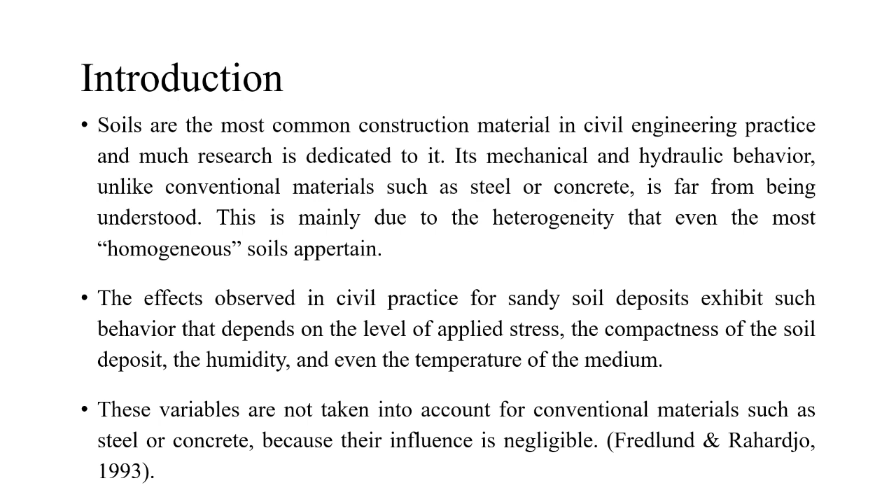In this regard, the prediction of the unsaturated soil fractions under a computational model that allows us to predict the volumes of the unsaturated fractions is of paramount importance. As an introduction, we are presenting the methodology to develop the computational approach to establish an algorithm for this.

As an introduction, we'll say that soils are the most common construction material in civil engineering practice. Its mechanical and hydraulic behavior, unlike conventional materials such as steel or concrete, are far from being well understood. For example, sand materials, which are among the most homogeneous materials, classified according to the Unified Soil Classification System as SP, poorly graded sands, are homogeneous materials which may have a particularly homogeneous size of solid grains.

However, even though these are uniform materials, in civil practice they still present lots of heterogeneity in terms of their mechanical and hydraulic behavior. For example, sometimes the flow of water in soils leads to variations in soil water content. These factors are the main issue that affect the flow of water, inducing permeability changes and mechanical variations such as volume strains.

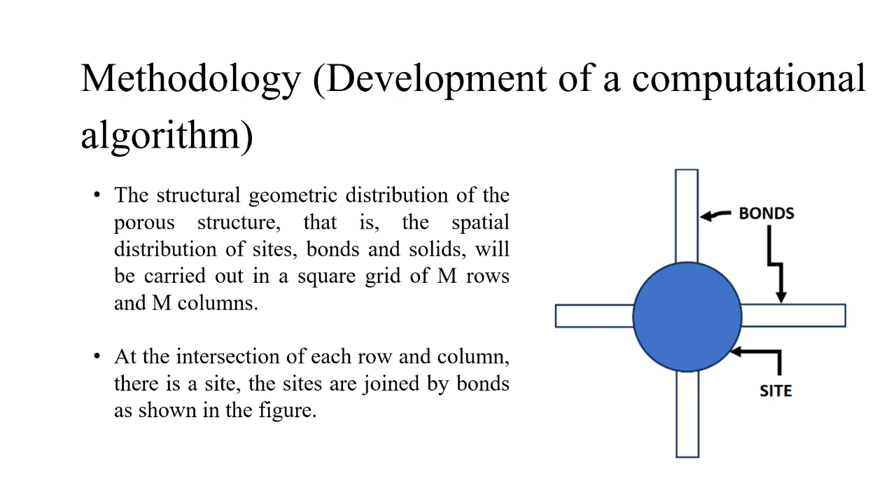It is important to determine that the number of sites and bonds that the numerical model will have will be determined by the frequency of each of them in the porous matrix. This frequency is commonly obtained from the pore size distribution, which is evaluated from the mercury intrusion porosimetry test. The frequency distribution can be expressed considering equation number 1, where f is the frequency and n is the number of sites contained within the porous matrix.

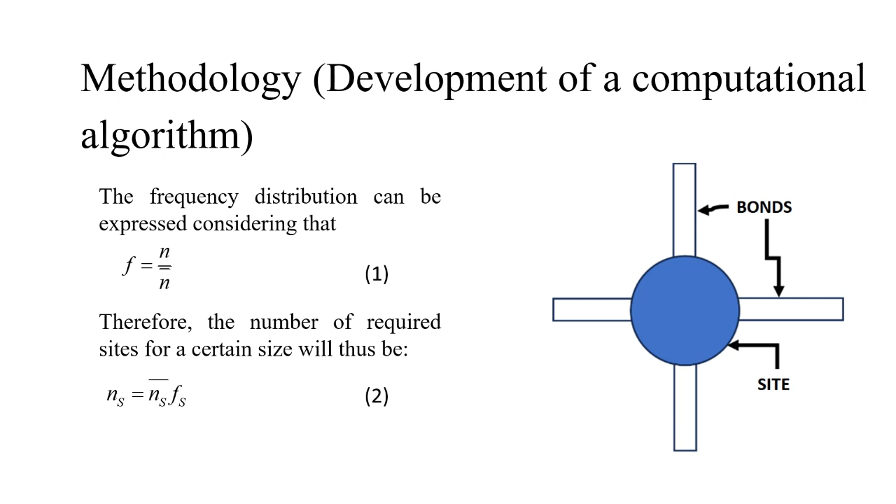Therefore, the number of required sites for a certain size will be the element described in equation number 2. It is important to say that before placing any site in a random spot, it is scanned in order to see if there is already any bond connecting to it. And if there is any bond connected to it, we will see if it can be connected. Well, the first scenario would be that the spot is without any bond and interconnections.

Then a completely random site is chosen from the distribution and placed on the empty spot. In order to do this, it will be placed only if it is greater than the given condition, to avoid the intersection of B1 and B2. This is because if it is too small, it will produce an overlap between the two bonds.

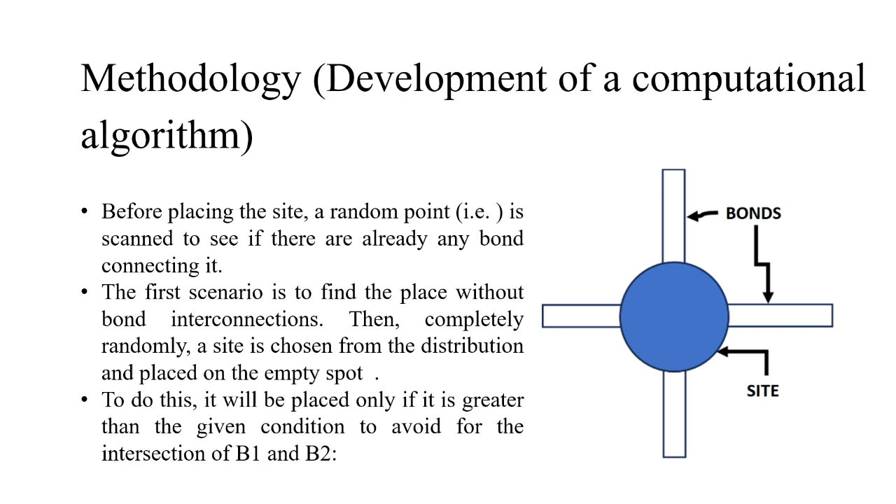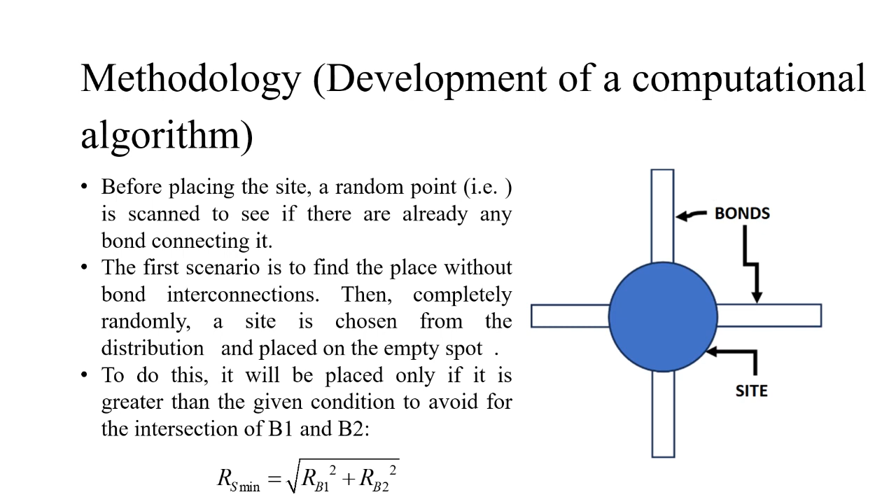So the condition to place the site is expressed by the equation, where the radius of the smallest site to be placed is the square root of the square sum of the radius of the bonds that are intersecting to the connection.

At the first stages, of course, the grid is completely empty, and it is very easy to find a place to place the sites where they are to be placed. As the process progresses, it goes harder and harder to find a site and the bond to connect and to comply with the conditions that have been previously expressed.

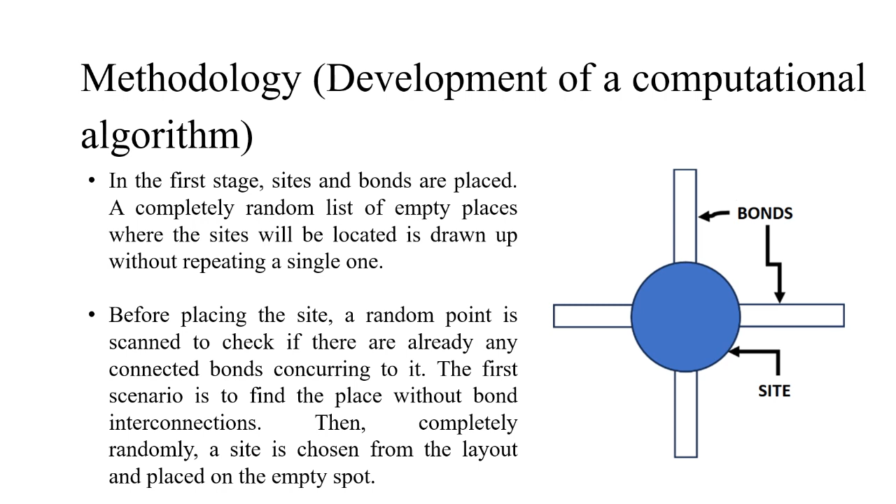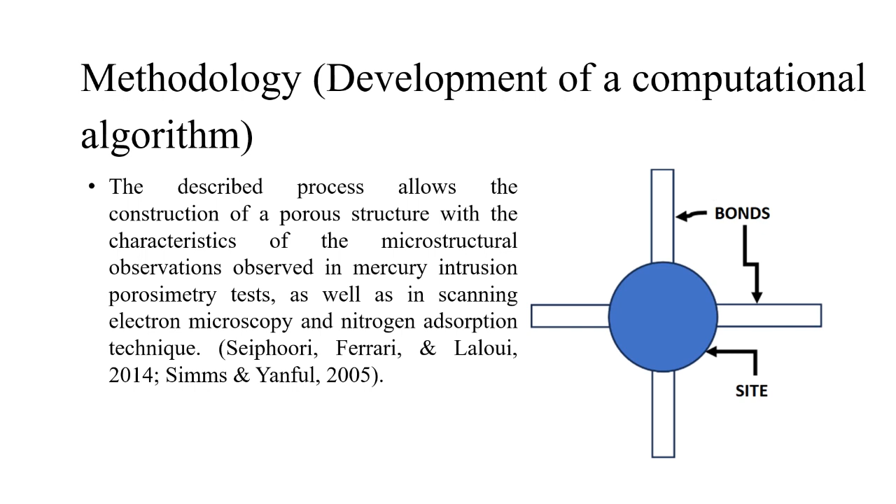The described process at the early stages is really easy. However, as it progresses, it's somehow difficult. However, the best site and the best bond to be placed in this spot need to be found nonetheless.

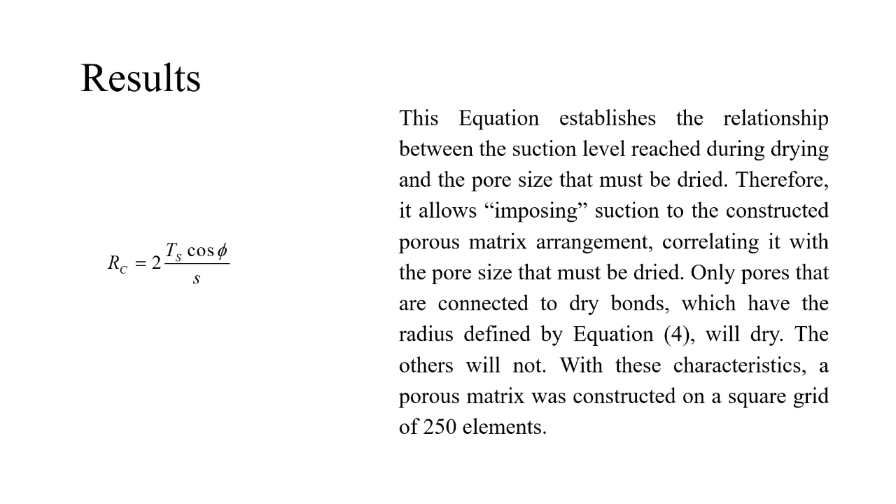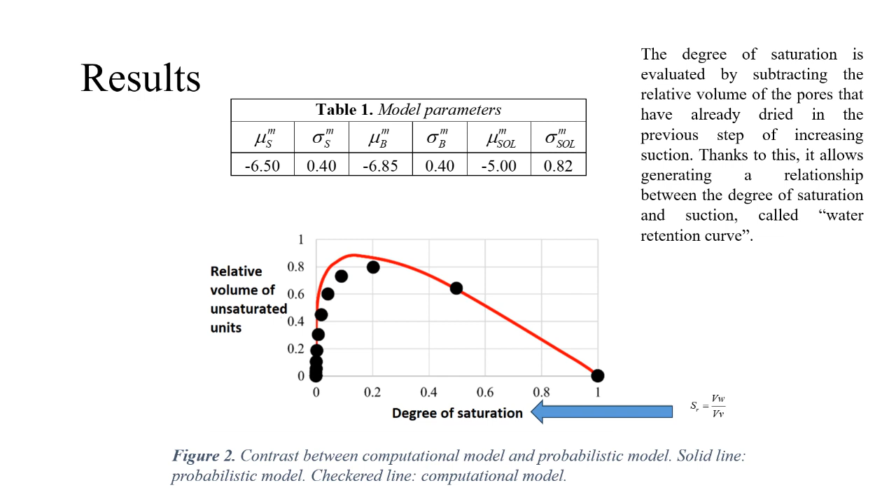As conclusions, the research work has presented a computational model generated through a simple algorithm that allows us to simulate important characteristics of the drying process in a porous medium, as it considers the interconnections between linear bond type elements and elements that store the water within the soil.

The conditions to dry need to be met in order for the material to dry, and the model presented herein has been contrasted with another well-established model, and they both coincide. So finally, the conditions are a function of the size of the pores that surround it, as well as the levels of suction achieved.